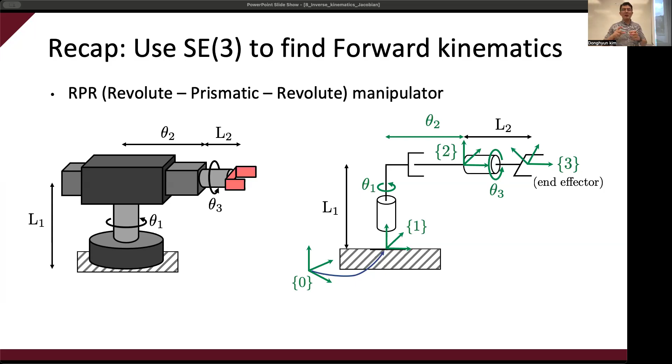Once you build up all the SE3 transformation matrices, what you need to do at the end is just multiply all together. So the final formula can be a bit tricky to interpret, but each individual matrix is pretty understandable, right? So that's how we build up the formula and find the forward kinematics. Does that refresh everyone's mindset? You remember, you didn't forget, right? Because today's lecture is going to be a bit confusing if you already forgot about this.

So homework 3 is about the kinematics. This is a 6-degree of freedom system. Of course, you're going to write the code. You're going to need help from a computational tool, so you are going to use Python. But keep in mind, this is not exactly the same as your small, cute miniature arm. The configuration is different.

Specifically, this one starts with roll, yaw and pitch, and the next one is roll, right? But in the homework problem it's just sequentially another pitch and then roll. So don't be confused by the different joint configuration. Anyway, the problem is basically asking the same question I asked in homework 1, forward kinematics and inverse kinematics. But to solve this inverse kinematics, we have to actually calculate the Jacobian. You remember that, right? And today we're going to learn how to build a Jacobian. It's going to be interesting.

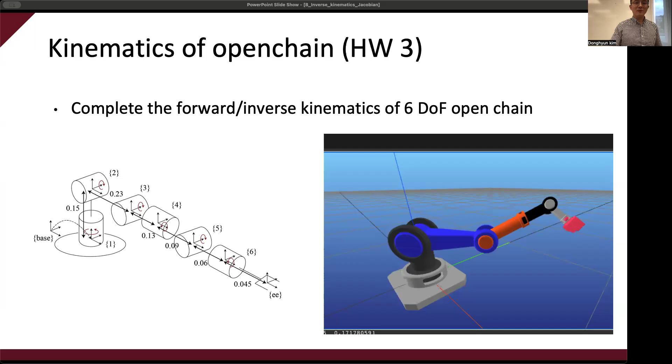Let's recap a couple of things we learned already. So we know that the Jacobian is a function of the joint position, right? It changes as the joint position changes. There are a couple of functions we learned. One is joint position to Cartesian position. What is the name of that function? Yeah, forward kinematics. And the other way, Cartesian to joint position, is inverse kinematics.

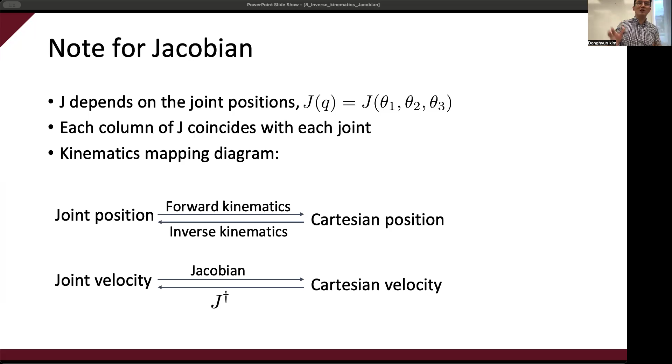Okay, let's move on. And then joint velocity to Cartesian end-effector velocity. Yes, Jacobian. And then Jacobian inverse. And this dagger means a pseudo inverse, because in many cases it is not a square matrix. Sometimes, actually many times, it is not invertible. So pseudo inverse. Okay. So we are going to talk about velocity a lot.

Let's check the previous example, but this time I'm asking something a bit different. What's the velocity, omega Q and v Q, in the quadrotor frame? So we are going to use a six-dimensional vector to represent the velocity. They call it spatial velocity, but no need to worry about that. It's just omega and the velocity.

If I write down this velocity in the quadrotor frame, then omega Q shows up in the y-axis. So 0.5 here, right? And 0. And the linear velocity is also pointing along the y-axis, right? So 0, 1, 0. Simple, right? Okay. Can you do the same thing for the tree frame? It's actually better to write it this way: quadrotor velocity seen in the quadrotor frame. So now the quadrotor velocity seen in the tree frame,

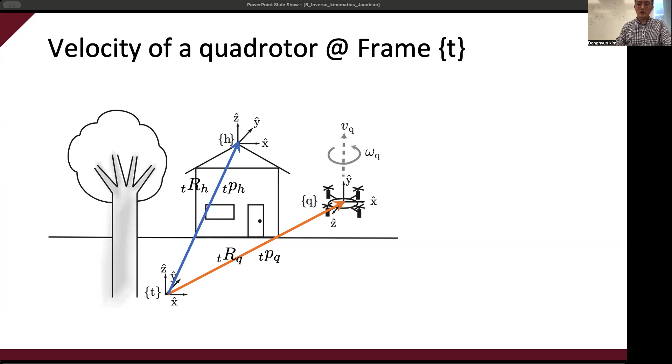So yeah, the equation works, right? Just rotating. See the same vector in a different frame with a rotation. So far, so good, right? We already did this multiple times. Okay, next question is if there is an arm attached to this quadrotor, then this arm is going to move together with the quadrotor, right?

Then the thing we have to understand is not only this frame transformation, we actually need to also think about the moment arm and the cross product. Are you familiar with this equation, P cross product omega? If you have a moment arm rotating, then you see the linear velocity at this point, right? If there is this big rigid body, let's use this one, make this posture, and rotate the first joint. Every joint and link of this arm has the same angular velocity, but linear velocities are all different, depending on the moment arm length.

So in case of the end effector, you're actually watching the linear velocity in the y direction, right, when you're rotating this way. The equation we can use to get the linear velocity is P cross product omega. In this case, P is 0.5, 0, 0.5, right? Without thinking about the size, what is the direction of the linear velocity? Because this one is rotating this way, you're going to see this vector. And the length of this arm is the same for the x direction and the z direction. That means there is a 45 degree, right?

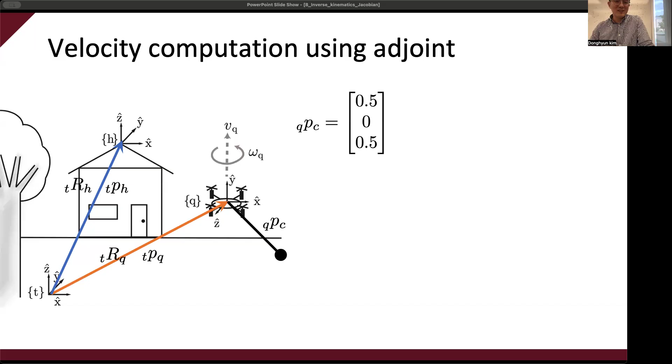Okay, so here this calculation, the displacement times the angular velocity giving the linear velocity, gives us one important idea. We can use these things to calculate the Jacobian, because each joint is rotating in its local frame, and I need the linear velocity at the end effector because of that angular velocity. So if we just stack up these velocities, then we can get the linear velocity of the end effector because of the entire joint velocity.

So the process is kind of like this. Let's say the first joint is rotating, and this first joint rotation is going to show up as rotation in the second link, second joint, and linear velocity. And we have the rotation matrix describing 2 to 1 and the linear vector pointing to frame 1 from frame 2. And doing this again and again up to the end gives us the end effector velocity. So what it's going to do is calculate the linear and angular velocity because of S1 here, and then the end effector velocity is going to be this plus the linear and angular velocity caused by the second joint.

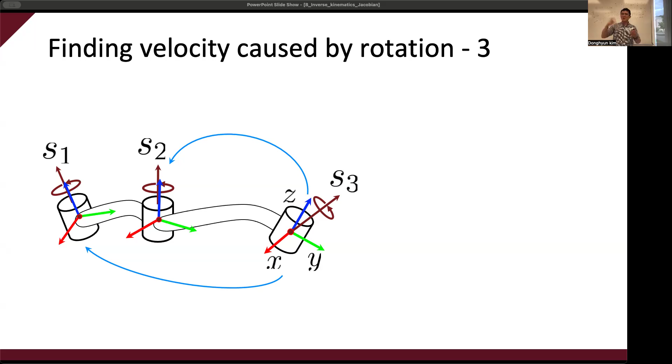Okay, when we write down this equation in a nice form, then we need something like this, adjoint mapping. And this adjoint mapping can give us a really nice form of the Jacobian. Let me describe this term. This term is angular velocity and linear velocity written in the local frame. And there are really nice things you can get if we write all the velocities in the local frame.

Okay, I said that the Jacobian is a function of the joint position, but if you are in the first joint frame, which is rotating together with your rotation, then when I ask, what's your spatial velocity in joint 1, you're going to say 0, 0, 1, 0, 0, 0. This is the spatial velocity in frame 1, because you're never going to see linear velocity, and the only angular velocity you can see is the revolute yaw. So it's actually independent of your joint positions because you're moving together.

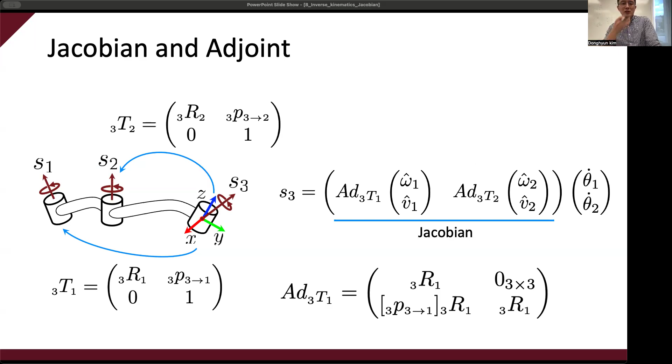I explain the formula, then check that the formula is true. Let's do this together. So for your insight, align all the joints at the 0 position. Then imagine that the third, fourth, fifth, sixth joints are fixed. Then we get the same 2 degree of freedom arm with this formula or with this diagram. Make sense? Okay. So the goal is finding the Jacobian.

And the Jacobian equation is going to be this. Say the end effector: the first term is the adjoint of T E to 1 times S1, the adjoint of T E to 2 times S2. Let's start from the nice part. S1 is 0, 0, 1, 0, 0, 0, because we are using the same local frame like this. And S2 is 0, 0, 1, 0, 0, 0. Right? So the equation is going to be this.

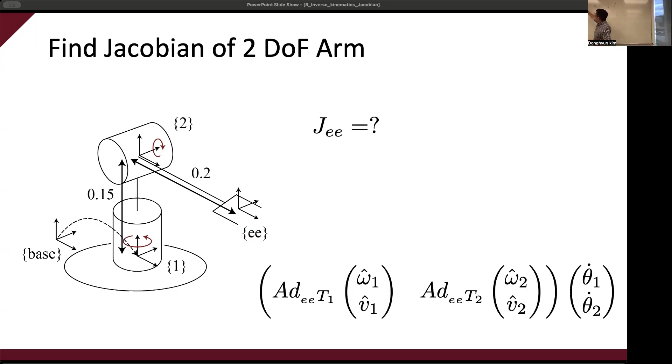The question is how to get this adjoint. S1, S2, we already did. Let's do the second joint first, because it looks easier. Can you see what the orientation is from the end effector to frame 2? Is any joint position associated with this orientation change? So you can see that this frame versus the second joint frame is constant, because we define the second joint frame after the second joint movement. So it always points at the end effector with the x-axis, and there is no joint position associated with it.

So T end effector to frame 2 is simply identity and minus 0.2, 0, 0, and 0, 1. Right? And the adjoint of this is again identity, 0, P cross product, so identity and identity. So I'm going to just ignore this part. P cross is 0.2, 0, 0, 0, 0, 0, minus 0.2, 0, 0. Right? And this one, 0, 0, 0, 1, 0, 0.

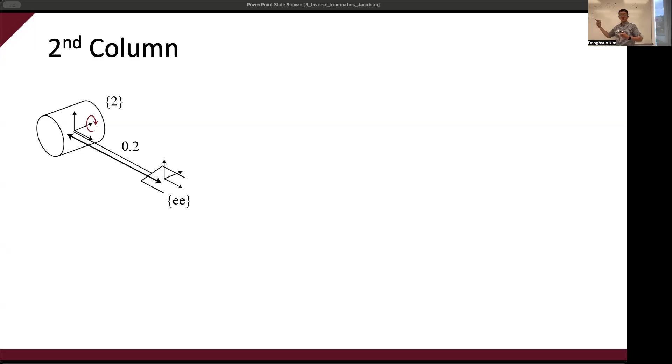And here is an important question. This R, the orientation of the first frame with respect to the end effector frame, should change as this robot changes the posture, right? Because it's going to be seen differently. Is it a function of the first joint position? Yes or no?

Is the first joint frame with respect to the end effector changed because of the first joint movement? Yes or no? No, right? So frame 1 is only a function of theta 2, because the joint 1 frame is also rotating together with joint 1. So we're not going to see any change if theta 2 is fixed. So what is this rotation matrix? This rotation matrix is nothing but R Y theta 2 transpose.

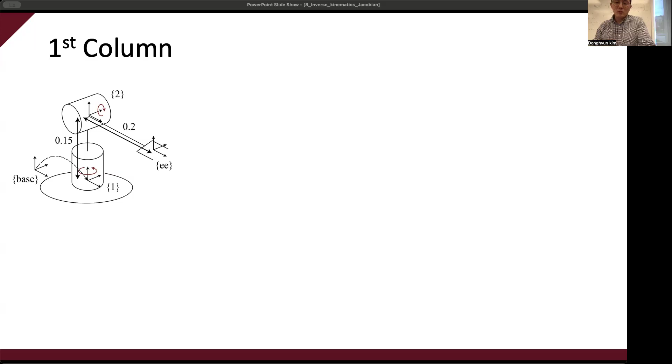So the next slide is actually an in-class exercise. Can you do the third column? Can you find the third column of this Jacobian? If I have another joint, so basically now you have this joint as well. We only have 5 minutes, so let's try it. I'm going to visit individually and see what's going on.

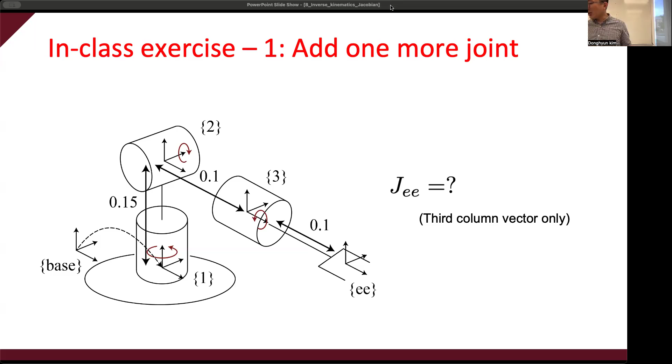Make sure I have this. Yeah, you have to. But here, when you multiply this one with this, you see that all these things multiply with 0, so it becomes 1 0 0. The linear part, let's see. To calculate it, you have to make P first, the skew symmetric matrix form, and multiply with this one, right? So the P vector should be minus 0.1, going negative, because of the end effector. And that's going to be negative 1. Then this product, and then multiply. Did I answer? Oh, yes.